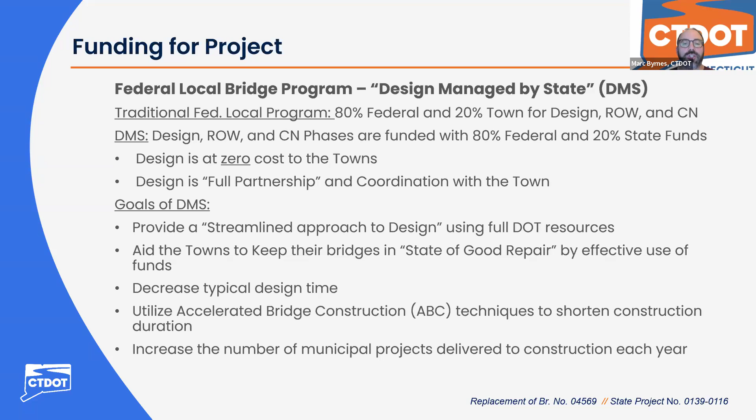The goals of the DMS program were to provide a streamlined approach to design using DOT resources and consultant resources, to aid the towns in keeping the bridges in a state of good repair by effectively using federal funds, to decrease typical design time from 48-60 months to 24-36 months, to utilize accelerated bridge construction, or ABC techniques, to shorten construction duration, and to increase the number of municipal projects delivered to construction each year.

I'll now turn it over to Lee Corbett, Director of Public Works for the town of Suffield. Thank you, Mark. This is Lee Corbett, Director of Public Works, town of Suffield.

Just wanted to let everyone on the meeting know the town has been involved with the project since inception. The Planning and Zoning Director and myself, the Director of Public Works, have been to the meetings and have presented town information and opinions. We fully support the proposed structure at this time. If any residents have any questions, they can feel free to contact me at any time.

Great. Thank you, Lee.

Representing the rest of the DOT are Derek Lassard, Division Chief of Bridges, Greg Funk, Principal Engineer. As I stated, my name is Marc Byrnes. Michelle Rain is the project engineer, and Zach Areno is the project coordinator for the Office of Rights of Way. Representing VHB, who is our consultant liaison engineer, are Mark Levesque, program manager, and Andy Shepard, structural design.

This slide shows a brief overview of the key structural elements of a bridge. Supporting the driving or traveling surface is the deck, which will also have parapets, which prevent vehicles and pedestrians from hazards on the side of the road.

Supporting the deck and parapet is the bridge superstructure, in this diagram steel beams. Supporting the superstructure and beams are the abutments, or substructure, and depending on the span length there may be one or multiple piers. Additionally, for earth retention, we'll see wing walls on the side of each abutment.

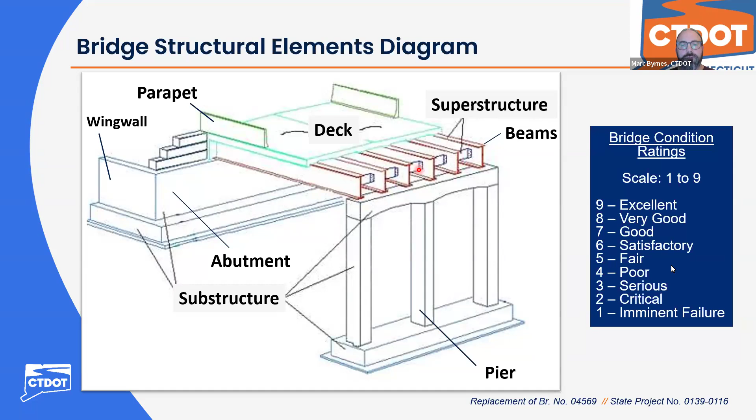This slide runs through some different types of concrete deterioration. Efflorescence is a chemical reaction where different chemicals inside the concrete react and create the white substance you'll see on the surface of concrete periodically. Honeycombing is a result of poor formwork or improper setup of concrete when it's poured, and when forms are removed you'll see those void spaces.

Scaling is a result of too much water and freeze-thawing that results in concrete surfaces scaling off. Map cracking is also a result of water getting into the concrete, and when it expands during freezing, it cracks and forms the cracks shown. A more severe case of honeycombing is spalling, where the concrete deteriorates past the surface and into the reinforcement steel behind it.

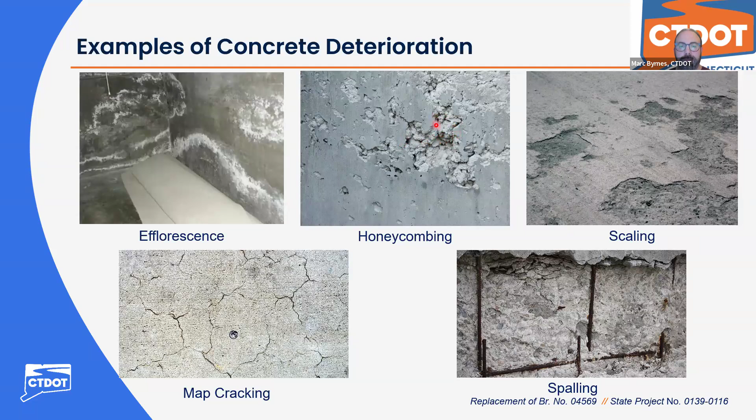Hi everybody, my name is Andy Shepard. I'm the project engineer for VHB, and this is project 139-116, as Mark said, Russell Avenue over Philo Brook in Suffield.

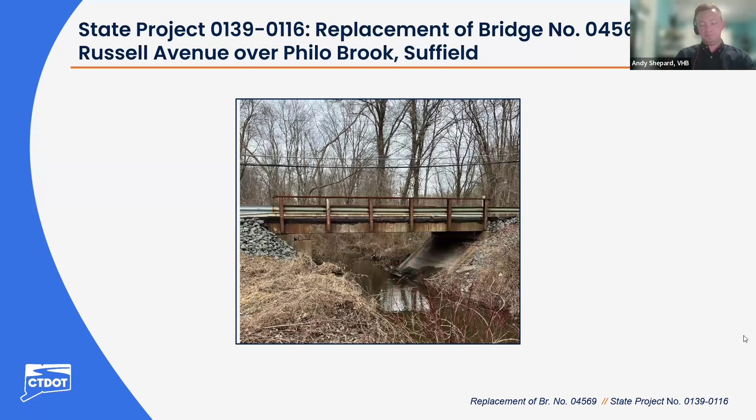So here we have the project location. You can see we're on a pretty sharp corner off to the west here. Here we have an aerial view. Obviously it's very residential and rural here, and we've got some farms.

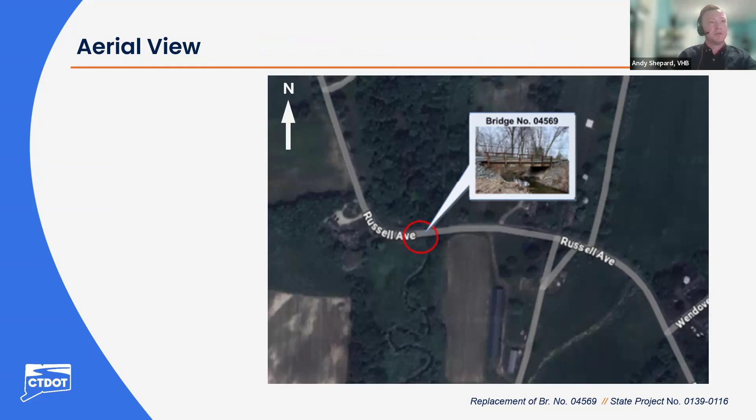So the existing structure was built in 1969 and consists of a pre-stressed concrete deck unit superstructure. There's one masonry abutment and also a sloped concrete abutment. The total structure length is 35 feet with a curb to curb width of 20 feet 3 inches, and we have an average daily traffic of about 1,050 vehicles per day.

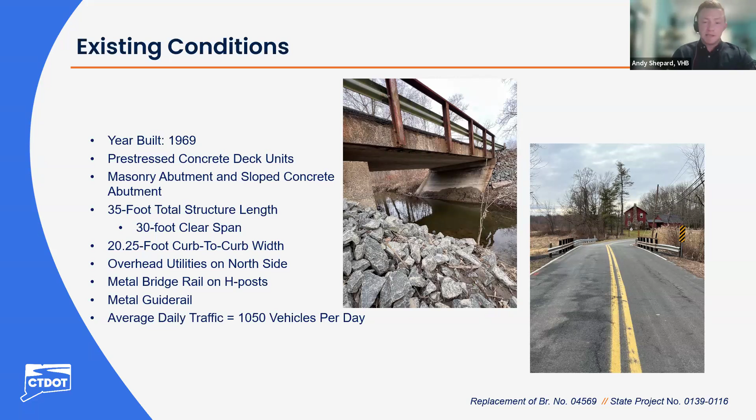So the deck condition is rated satisfactory with a rating of 6. The bituminous overlay has areas of light raveling and some random cracking. There's also widespread dampness on the underside, as well as random spalls with and without exposed rebar, and those are deteriorating as well.

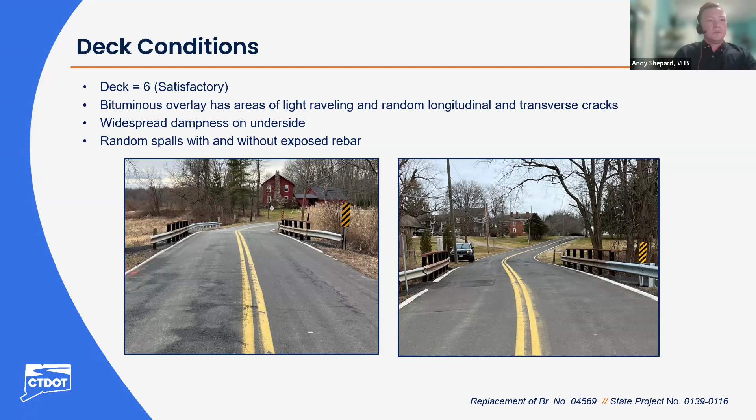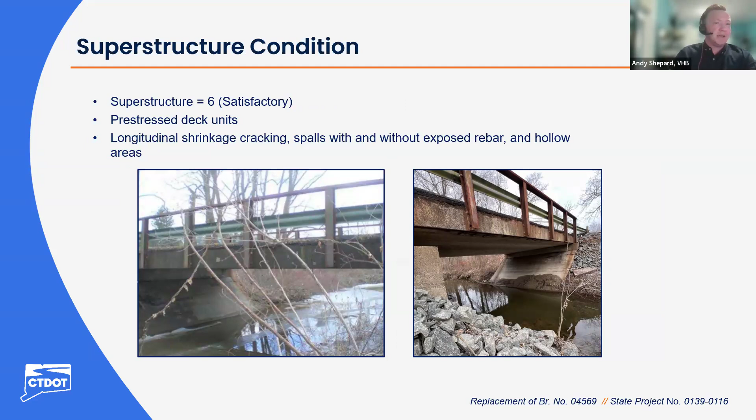That brings us into the superstructure. Superstructure is rated a 6. As I said, these are pre-stressed deck units, and we do have some shrinkage cracking as well, and also those spalls I mentioned with exposed rebar.

Substructure is rated a 4. Like I said, we have two different types of abutments here. We have the masonry wall with areas of cracked and missing grout, and also large voids between the stones. There's also missing mortar and some severely deteriorated stones that basically fall apart when you touch them.

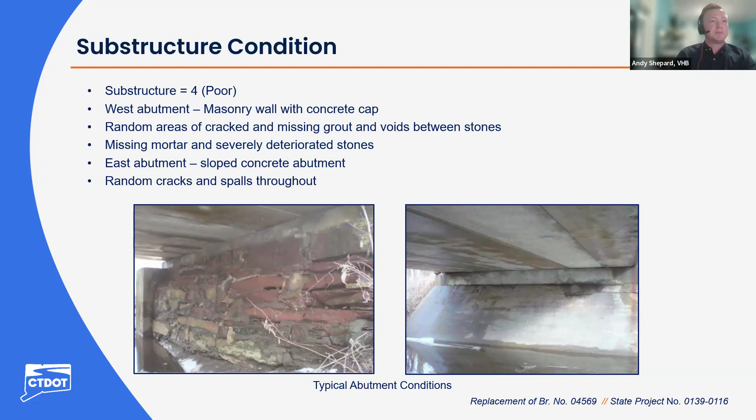The east abutment, or the sloped concrete, has areas of random cracks and also some spalling throughout. The channel here consists mainly of mud and silt, and there's also some heavy undercutting and erosion up and downstream, and some pretty heavy vegetation growth.

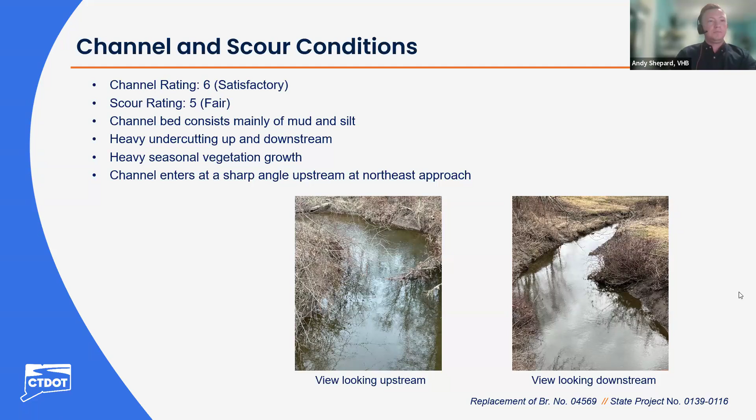So the proposed replacement here is concrete box beams, consisting of a single 50-foot clear span on reinforced concrete abutments on piles. We'll have an open metal bridge rail as well, and here we have an elevation view, which basically shows the bridge as if you're standing in the water looking at it.

The proposed structure here is shown in gray. The wing walls are in pink. The box beams are in orange, and the railing is in yellow.

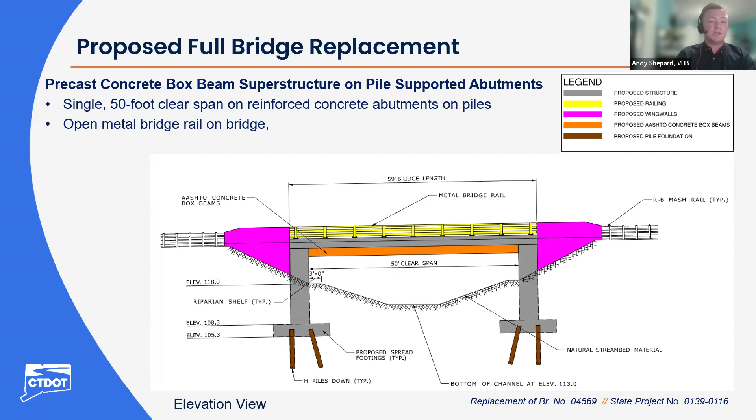So here we have the cross section, which shows the bridge as if we slice through the structure while standing on the roadway. We'll have a 29.5-foot out-to-out width and 26-foot curb to curb width, with two 11-foot travel lanes and two 2-foot shoulders.

We'll have membrane waterproofing and the bituminous overlay. The bridge railing here again is shown in yellow, the wearing surface is in black, the deck is in gray, and the box beams are shown here in orange.

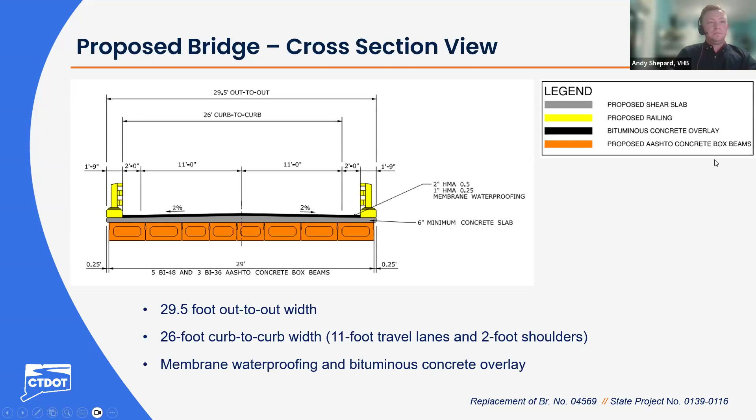So here we have the plan view, which basically shows the entirety of the project area. We'll have new approach slabs and a guide rail that meets all safety standards, and some overhead utilities that'll be relocated during construction. The existing pavement is shown in gray with the roadway reconstruction in yellow. Wing walls are in pink, and the proposed structure is shown in orange.

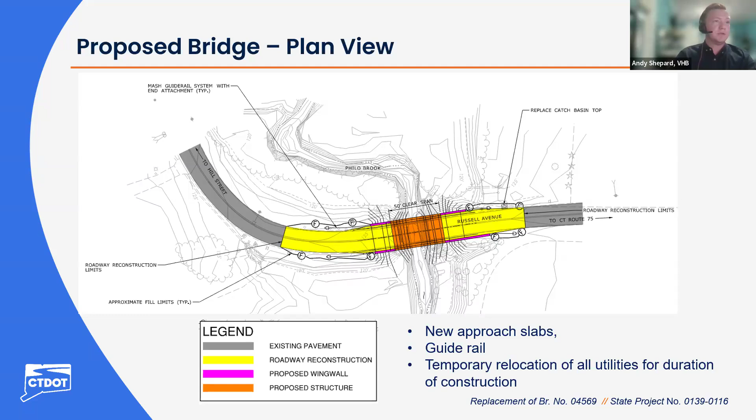Here we just have some examples of concrete box beam structures, showing you what the bridge could look like.

We are proposing a full detour for the duration of construction, and it'll be about 4.2 miles or 6 to 8 months long, including Russell Ave, North Street, Halliday Ave, and Blossom Street.

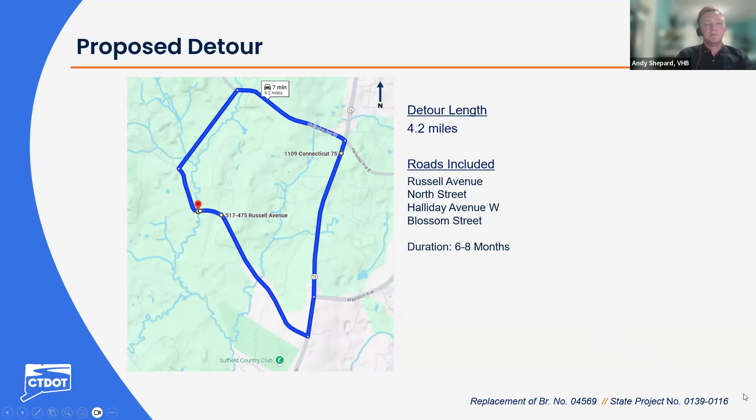Our permits here are local inland wetland, the Army Corps self-verification, and flood management certification.

Rights of way here are pretty minor. We're looking at just some slope easements for support because of the raise in the roadway profile, and possible construction easements for the contractor to complete the work.

All right, now I'll hand it off to Zacharino for some rights of way info. Thanks, Andy. Again, my name is Zacharino. I'm a project coordinator with the Department's Division of Rights of Way. Our office is responsible for acquiring the property rights that are needed for the project.

As Andy mentioned, this project will require the acquisition of property rights, so I'd like to give you a brief overview of our acquisition process. Before I begin, I'd just like to mention that specific impacts are still being finalized and may change as the design progresses, and that any required property rights will be acquired in accordance with Connecticut General Statute Sections 13A-73, 13A-98E, as well as the Uniform Act.

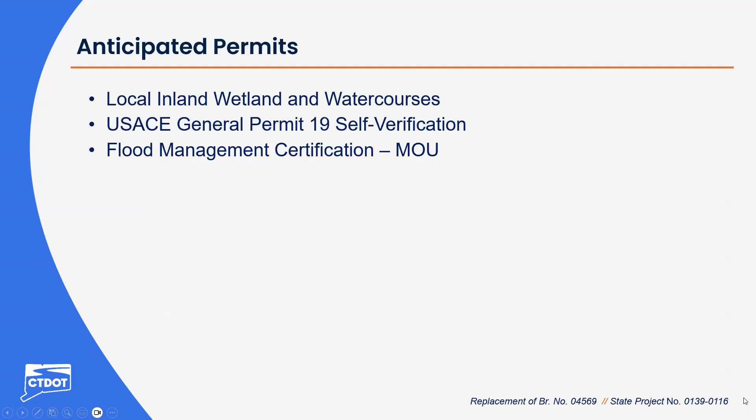My last question is about the aesthetics of how the bridge will look, because right now they put that metal guardrail there back in 2020, and that was supposed to be temporary because the existing...

Okay, so not to interrupt you at all - I was just trying to get you some examples. This is just examples of what it could look like. Things can change, but the town will be involved in all of that decision process, and we can discuss different formworks or anything that might be incorporated into it.

Okay, and are these bridges the ones that were redone in Suffield, or are these just examples of box beam bridges? Essentially what we're going to be putting out there, just in different towns, but yeah, in Connecticut.

I have to say that Russell Avenue is very farmland - it has a winding, beautiful look to it, and we want to keep that aesthetic. We don't want a metal bridge like right now. The metal beam put there currently was supposed to be temporary. The existing guardrails are the wood with the metal rope look, and we kind of want to keep that country road look - what I'm seeing right now is really going to take away from the charm.

I just heard about this, so I think the due process was a little mistaken, and we didn't get notified, and nobody did. So yeah, this is good. This is just public info, sorry.

This was advertised in 2 newspapers and I believe letters were sent to the abutters. Once we start requesting property maps is when the Office of Right of Way will go out and contact owners. They're still very early in the design, still at 30% right now, so we wouldn't reach out to property owners because we really don't have a general idea. We wouldn't go out to make property maps and make offers for property we may or may not need.

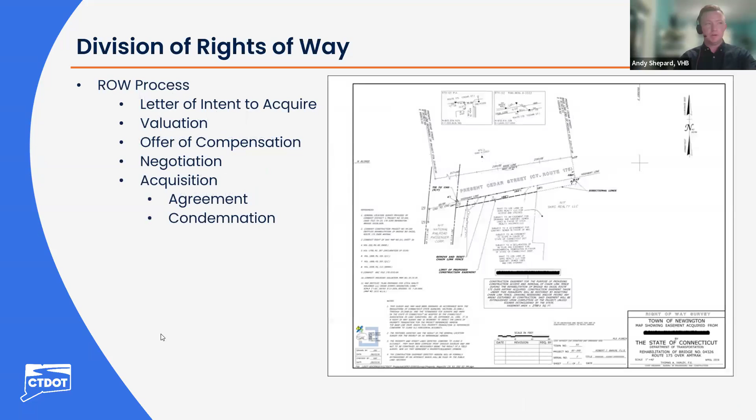So this is just basically our anticipated plan, what we think is going to be happening. It's not anything solid. I appreciate that, I have no concern about that. Only that one hears it, and I had no notification because I only heard it today when Michelle told me.

So as you're going down Russell Avenue, you're approaching the bridge, right? Yes, and then there's a corner. So obviously our land is to the right, and Vincent's land is to the left. So how much land do you anticipate taking in that section going down on the right-hand side, which is ours, coming down Russell Avenue? I believe right now we're only anticipating about 150 square feet.

Well, I'm not so good at that myself, but how does 150 square feet come out? Can I just jump in? This is Mark from VHB. It's really because we're raising the road a little bit, and it's just slope. At this point it seems to be like a slope easement, not an actual take, so it's just going to be a little more fill on your property.

At this point we don't know, as this is early in the design, but from what we have laid out, it's really just because the road is going to be raised up a little bit, we have to bring the slopes down so we don't have to put in a retaining wall or anything like that. You probably won't even know it in the future, after it's all done for a few years and everything's grown back in.

I see. So essentially you're just taking the slope, the topographical area, to slope down off the bridge to blend it into the surrounding land that's already there. Exactly, correct. Yes, okay, all right.

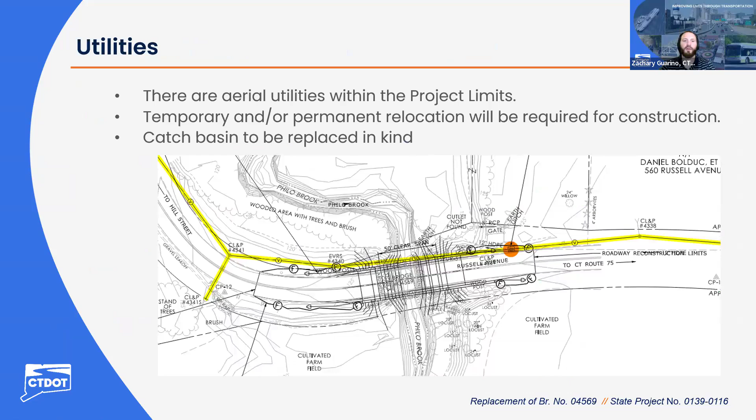On the where? The project webpage. Which webpage is that, please? Go to the... Andy was the... it's DOT... yeah, I'll go back to it.

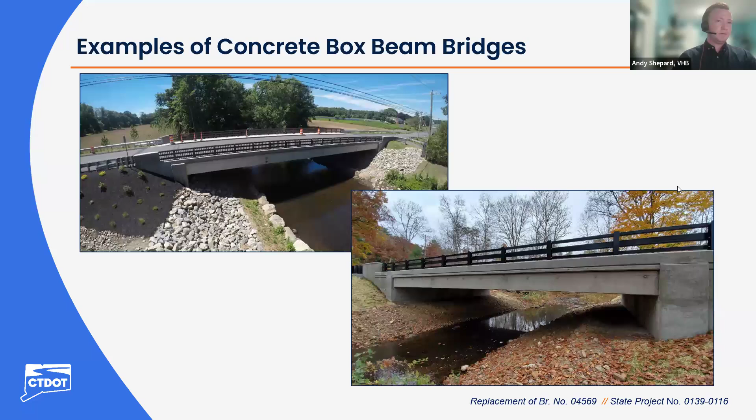I think you've answered the concerns. One is straightening the road so it doesn't become a speedway. Secondly, the aesthetics of the area, because it's a nice country road in town. Everybody likes that, because Suffield's a wonderful town anyways. And then the land, if it's sloping off into there, we understand that. So all of that will allay a lot of fears that some residents expressed when they heard the bridge was being put in five lanes wide and double-decker like the George Washington Bridge, but they'll be glad to hear the change isn't that drastic.

Correct. I appreciate the opportunity to speak, and appreciate you answering my questions. It's been very nice, thank you very much. Thank you for asking.

One other thing to touch on for aesthetics: we can do metallizing so it won't be galvanized. We can do a pigmented paint that acts similar to galvanizing, but we paint it instead to give it a more aesthetically pleasing look, so it's not just bright silver. Also for aesthetics, the town will of course be involved in all those decisions, so we'll have everyone involved that needs to be, to make sure it doesn't mess up the farmland you have there.

I think painted is important, so everybody's on board with it. You're being kind to talk to everybody now. That's important so everybody knows what's going on. They don't feel left out, and that you have a concern. I think that's what makes people feel better too. I appreciate that very much. I look forward to the next meeting.